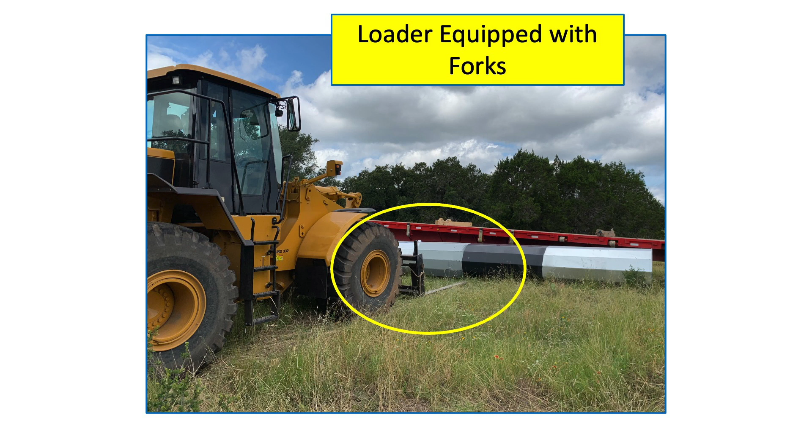The difference is that a loader like this is an articulating loader that hinges in the center with hydraulics, and the front end swings back and forth. It is nowhere near what a forklift is, and there's a very distinct difference because of the licensing or the qualification of the operator. In all of labor, there are only 2 operator licenses that are required.

One of those operator licenses is the forklift operator. And the forklift operator has to be licensed, which they can be licensed by the employer's own training program, but they have to be licensed to a specific criteria. In other words, they have to know information for a written test. The information they have to know is specified by OSHA. They have to demonstrate the use of the forklift. They have to demonstrate the inspection of the forklift. And they have to do that with a qualified inspector.

And then once they've done that, they receive a license, which can be on the back of a business card. All it has to have is the name of the inspector that did the training, who did the inspection, the name of the person, and the model of the forklift that they are qualified to operate. And that's a requirement of the standard.

Now that puts a certain responsibility also on the operator, because once you hold a license, you now have a responsibility to operate that forklift within the confines of the safety requirements of the OSHA standard and the employer's OSHA standard. The difference is that the other license is a crane operator. Those are the only 2 licensing requirements.

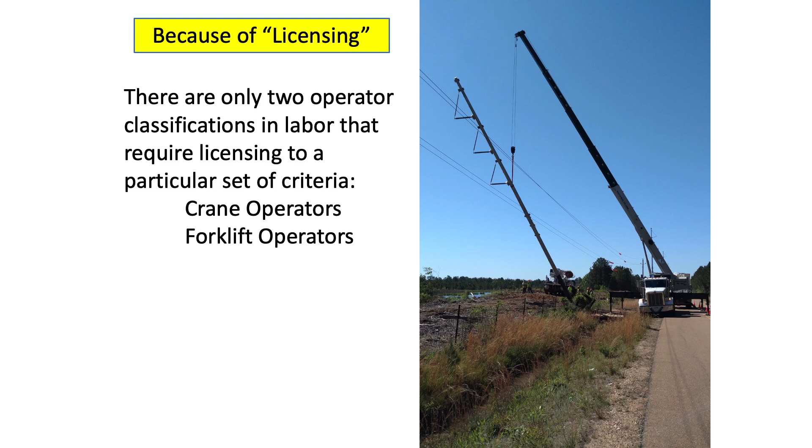The crane operator has to be licensed by a third party. They cannot be licensed by the employer. And that third party has to be certified and has to be approved by OSHA, having received their certification under a nationally recognized certifying agency. So that's where you get the idea of NCCCO and some of the others. I'm not advertising one over the other, but that's just an example that you're probably already familiar with. Now, the difference.

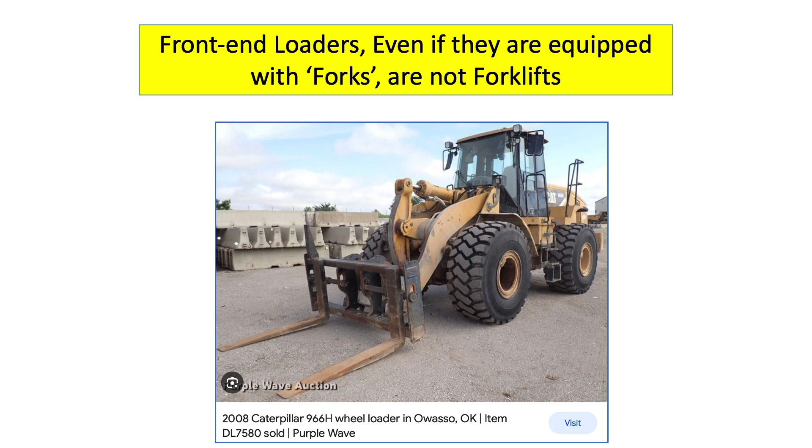Front end loaders, even if they are equipped with forks, are not forklifts. Now, I said that it's litigation that has brought me to these particular topics because on a number of occasions, OSHA has cited a contractor for having unlicensed operators operating loaders with forks. And because of the work that they were doing, they called that a serious violation of the forklift operator standard. And it's simply not true.

Now, here's the hard part. I always hate to do this, but we have some rules in the OSHA standards, and the worst thing that you can do as a trainer is put a whole bunch of text on a board for a whole bunch of people to try to read. But the reason why I do this is because no matter how much I tell you that the rules are there, very few of you are actually going to go and read it, unless you are the people who are administering it. So we're going to touch on these rules.

OSHA calls them PITs, powered industrial trucks. So first we're going to talk about the PIT standard and why it doesn't apply to these loaders equipped with forks. The very first rule: this section does not apply to compressed air or non-flammable compressed gas operated industrial trucks, nor to farm vehicles, nor to vehicles intended primarily for earth moving or over-the-road hauling. So what is a front end loader designed for? It is designed and built to move earth. It's an earth moving piece of equipment.

But we have found that because they can navigate very, very rough terrain with great efficiency, they have a lot of power, so they can lift heavy pieces of equipment and materials that we use in transmission construction. They are the perfect tool to operate on these right-of-ways, which is the reason why we've been using them.

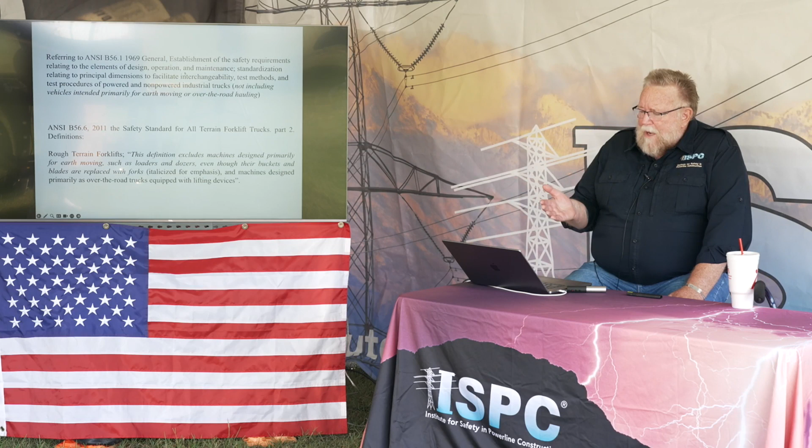So if you are a safety administrator, knowing the OSHA rules is one thing. Reading the preamble is just as important, if not more important, than knowing the rules, because it's the preamble that tells you what OSHA's intent was. The preamble includes all of the discussion by stakeholders, because when OSHA creates a new body of rules, the first thing that they do is they put out a notice of rulemaking, or what the proposed rules are going to be.

Then the stakeholders, the ones who are going to be covered by the rule, will send questions to OSHA, and sometimes OSHA will have hearings around the country for rulemaking that's going to have a huge impact on an industry. And these stakeholders will come and ask OSHA questions, and OSHA will answer the questions about why the rule is the way that it's written and what it's supposed to cover. So there's a ton of information there that is valuable to you as the employer, as a supervisor, and even for foremen to understand what it is that the rule intends.

Because the rule itself, remember, doesn't necessarily tell you how to do something, it tells you what you have to accomplish. And that's an important distinction between those two. You find out what you're supposed to do and how you're supposed to accomplish that by reading the preamble.

So in the preamble, OSHA addressed rough terrain forklifts, and they wrote, and this is the bottom paragraph that you see on your screen, the definition excludes machines designed primarily for earth moving, such as loaders and dozers, even though their buckets and blades are replaced with forks, and machines designed primarily as over-the-road trucks equipped with lifting devices. These are not forklifts. And then finally, in the preamble, the direct question was answered. It says equipment that was designed to move earth but has been modified to accept forks is not covered by this rule.

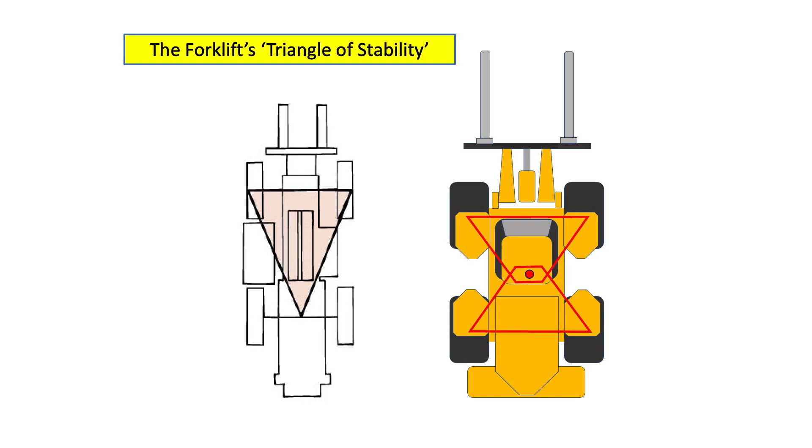Now, if it's articulating at a center point, it's not designed anywhere near with the same kind of stability that a forklift has. So the whole design concept of the stability between the two means that that operator, who has to be qualified as an operator, understands how that loader equipped with forks is going to move and be operated, but is not required to meet those forklift standards because the two pieces of equipment are not alike at all.

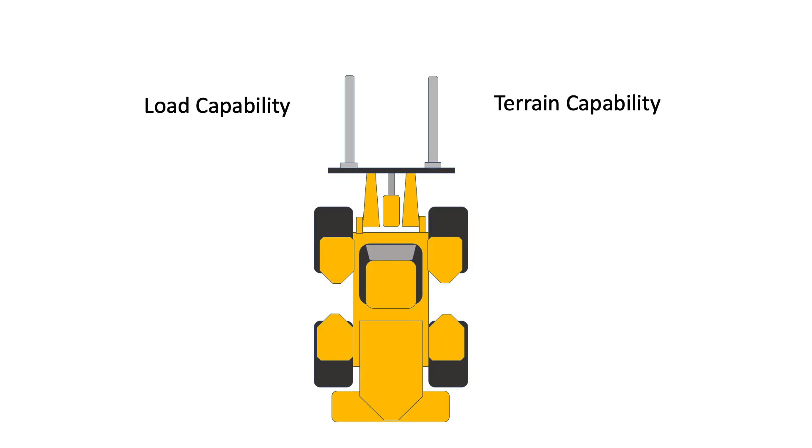And like I said before, the reason why we have been using these loaders is because of that load capability and that terrain capability. The other thing that we have seen, and one of the citations that came about, was called load securement. Now, if you are a forklift operator, you know that you slide the forks underneath the pallet. The pallet is supposed to be stacked a certain way, and you're supposed to secure the load.

And normally, we slide the load all the way back on the forks so that it lays against the backrest, and then we tilt it back slightly to help secure that load. And if we need to, we may strap or plastic wrap that load so that the load won't fall off. That's important, especially if you're in a warehouse full of people, because people are always nearby when these forklifts are operating.

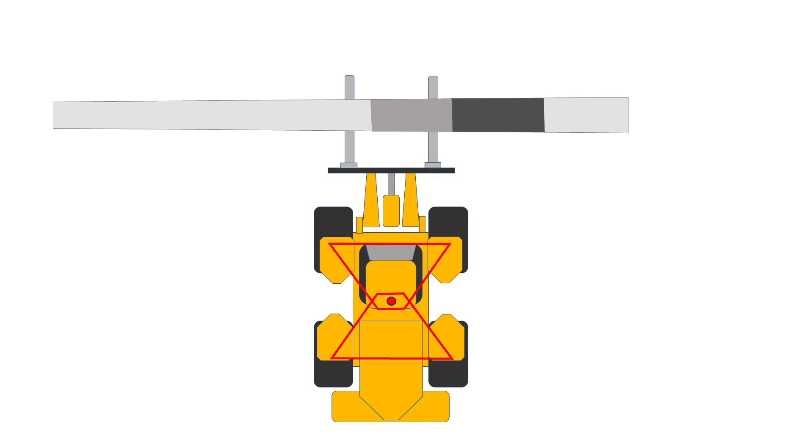On the other hand, if I've got a 6,000-pound pole sitting on the front forks, I don't tie it down. I'm going to tell you why in just a minute. So immediately the first thing that people say is, well, that's dangerous. A 6,000-pound, and usually there's 12 flat sides on most of these transmission poles. Some of them might be round concrete. They said it can roll or it can slide off of the forks. And so the answer to that is, so what?

Watch this. If the pole falls off of the forks and hits nobody, OSHA doesn't care. It's that simple. I thought about writing a book about the simplicity of complying with OSHA, and I'm going to title it, Don't Swim with Piranhas. If piranhas will eat you when you're in the water, how do you prevent that? Don't swim with piranhas. Well, if a pole falling off of the forks will hit somebody, don't allow anybody to be in that space. So this has to do more with work planning and methods of work than anything else. And there's a good reason for that.

Now, let's look at this. Here's our loader. Our pole falls off the loader. There is a hazard zone where that pole might go. Now, we're professional linemen. We know what the trajectory of hazard is when we're under a strain. We figure those all the time. We know where the wire is going if something breaks. We know where the rope's going. We know where the hoist is going. We stay out of that line of fire.

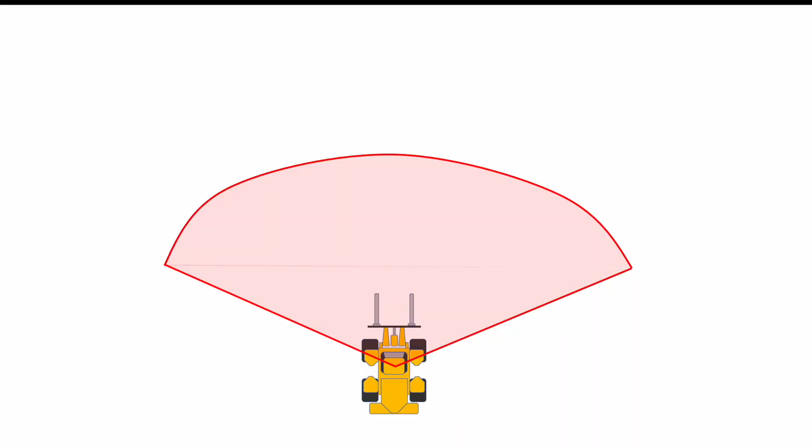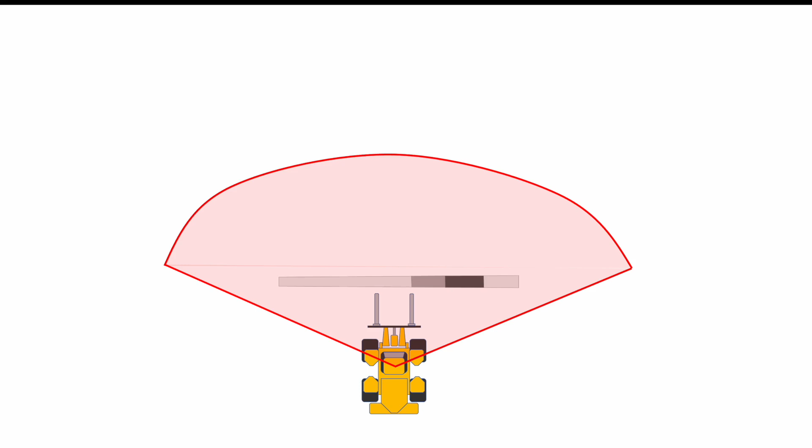Well, we do the same thing with a pole on the front of a forklift. If I put a pole on the front of the forklift, then my work procedures ought to say, this is where you stand, this is not where you stand. And sometimes there's no great distance. Sometimes we pick it up off the back of the truck, move, we set it down, and it stays right there until the crane comes by, picks it up, and puts it in the ground.

Other times, because of the terrain, our staking point may be some ways off, and we may have to go some distance with that loader. That might include rocky areas or inclines or slopes. If we have a policy and we have a tailboard that says, okay, here's where we're picking it up, here's where we're going. If we lose the pole, this is where the pole's going. Just make sure you're not there. If it falls off, nobody gets hurt, no big deal.

Now, the question is then, well, why don't we just tie it down? I have seen these used on job sites. Now, this is called a timber carrier.

Sometimes I have some other names for them. And I wrote on here, great for mills like timber mills, not so great for poles. See, if I'm carrying pieces of wood and I clamp down on that piece of wood, I can pick it up, I can turn around, and I can go where I want to with it.

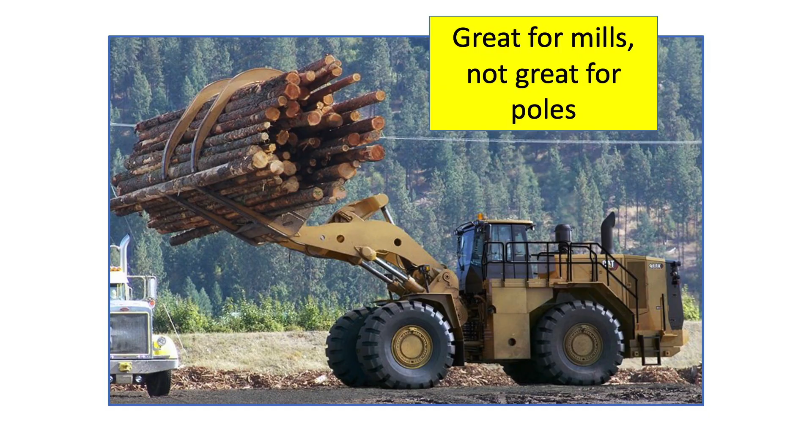But what happens when we put a 30-foot long, 6,000-pound pole across the span of the forks and we clamp down on it? Well, remember the idea of the stability that we talked about? Look how this loader moves. The loader moves by articulating. And when the loader moves by articulating, look what happens to the dynamics of the loader stability when the pole weight is on there. If I articulate around to the side, you can see the angle across the square of my wheels has changed, and so has the support dynamics of the piece of equipment.

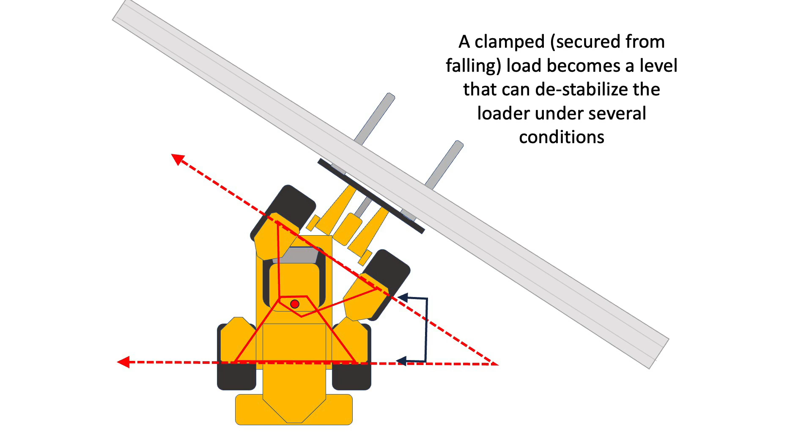So if I've got a 6,000-pound pole and I've got it strapped down to the loader, and I have some elevation on my load, maybe because of terrain or whatever, and if the pole starts to rock, and it puts 6,000 pounds of sideways torque on that side of that loader, what do you think is going to happen? There's a good possibility the loader will turn over. So it may not be a good idea to clamp that loader.

Of course, the other side of that is that if we're using the clamps, we also damage the galvanizing or the coating that's on the pole. That's another side issue. But the bigger of the issues is that if I clamp the pole down, I lose stability. So what it boils down to is this: your loader operator has to be qualified as a loader operator. They have to be trained in the dynamics of lifting a pole.

You should have a policy for loading and unloading poles on your job site and the use of front load fork equipped loaders. The people on the ground should be aware of where they are supposed to be and where they shouldn't be when we're doing loading, and recognize that losing a pole is no big deal as long as nobody gets hurt. Now, you can choose to use the clamps if you want to, and if it's just a matter of picking the pole up, lowering the clamps, and we're not going any great distance, and the terrain is okay, there probably won't be any problem.

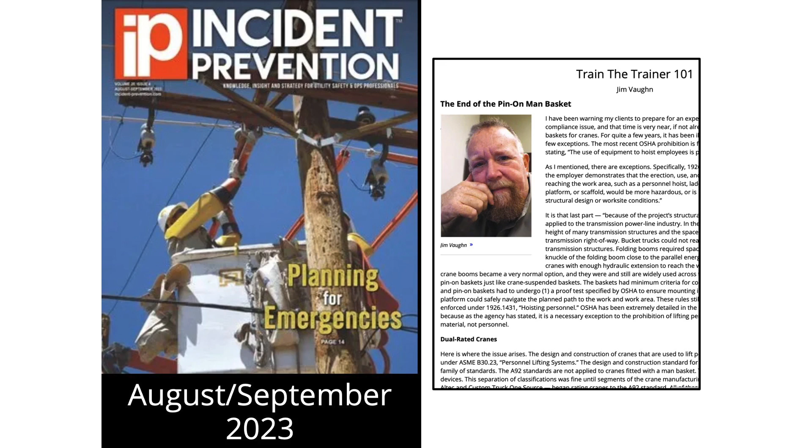Now, Incident Prevention, most of you who are watching today are probably familiar with Incident Prevention Magazine. In the August-September 2023 edition, I wrote an article in Train the Trainer 101, and the title is The End of the Pin-on Man Basket, that explains this issue with the man basket. Read that article, because it goes into very much detail about why this is becoming an issue with pin-on man baskets, but we're going to talk about it here. I'm going to explain it.

So that rule that says lifting workers or personnel is prohibited goes on to say, except where the employer demonstrates that the erection, use, and dismantling of conventional means of reaching the work area, such as the personnel hoist, ladder, stairway, aerial lift, elevating work platforms, or scaffold, would be more hazardous or is not possible because of the project's structural design or worksite conditions. This is the exception.

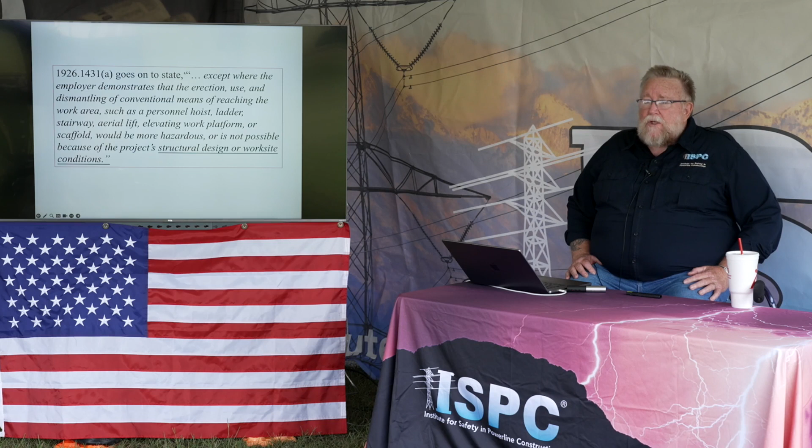Structural design, worksite conditions. Well, one of the worksite conditions is that for the longest time, there were few bucket trucks that would reach the top of a 200-foot pole. Well, that's starting to change too. So that could change the way that we do the work. So let's talk about these exceptions.

When we say consensus standard, you probably already know, these are the rules like ANSI, ASTM, ASSE, NFPA. These are groups of stakeholders in the industry that consider work methods, equipment, materials, and they help design the best practices associated with the work. OSHA recognizes that these are best practices, and OSHA uses these best practices sometimes as a guide for their own inspectors, and other times they adopt these consensus standards. When they adopt a consensus standard, it has the authority of law. So if OSHA adopts A92, then the parts of the A92 standard that say shall are citable by OSHA.

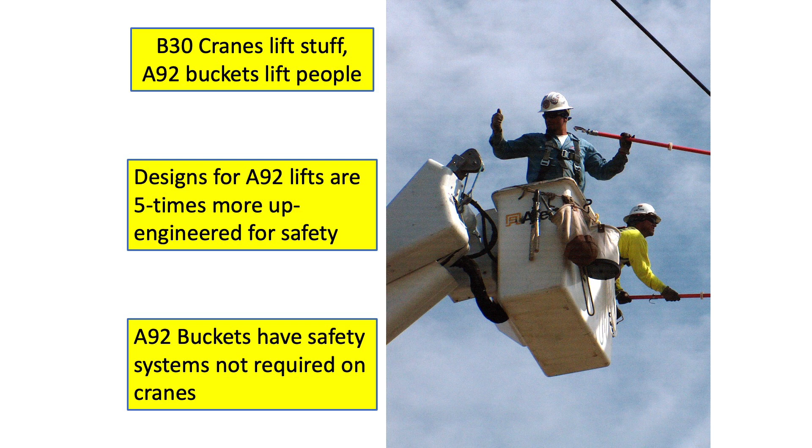The designs for A92 lifts are, and we say on the average, 5 times more engineered for safety than a crane is. You know, the crane considers that we pick it up, we swing it around. If something breaks, the crane falls down, doesn't hit anybody, no big deal. On the other hand, any bucket truck that comes down has got people in the end of it. It's always going to hurt somebody. So the criteria for the protection of workers generally has a much higher safety standard than a mechanical standard or a rigging standard might have.

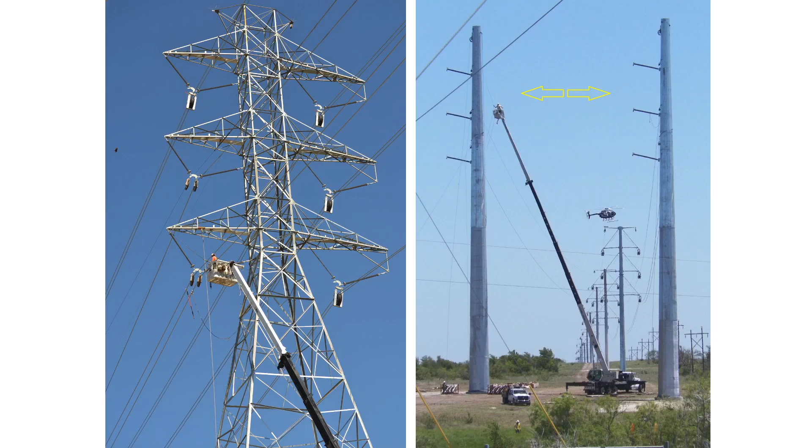And then A92 buckets have safety systems that are not required on cranes, such as elevation or balance setup so that you have a level balance, tension on the outriggers. There are a number of other sensing systems, and if you're a lineman that's been running a bucket, you know that sometimes your bucket shuts down in the middle of an operation because some safety system somewhere locked up, and you couldn't go any farther because you had to back up in order to reset whatever the safety condition was that locked up the bucket.

But this is the basis for the exception. Remember we said the structure or conditions. And what you see here is a man basket on the end of a crane. Look at the picture on the right. Just to the side of the structure that they're working on is another structure that's only about 50 yards away. Well, if I had an articulating bucket truck and I wanted to go to those inside insulators on the side of that pole, I have to be concerned about the other end of my elbow. It's going to be bumping into the pole on the other side.

And if you're working in a right-of-way where you're building a new circuit where other circuits already exist, and I put that articulating boom up in the air, the elbow of that boom is going to be over there in that electrical environment, picking up induction or whatever else is in there. That's one of those structural conditions that we have used as an exception that allows us to use pin-on man baskets. The other one is the conditions of the project.

You see that this boom here is at the bottom set of travelers on this structure. That top set of travelers is close to 200 feet up in the air. Well, almost every 35 or 40 ton crane will reach that 200 feet. Bucket trucks would not do that until recently. Most of those bucket trucks we have had historically in the industry would barely reach 160 feet. But the manufacturers have started to employ some other technologies in their booms.

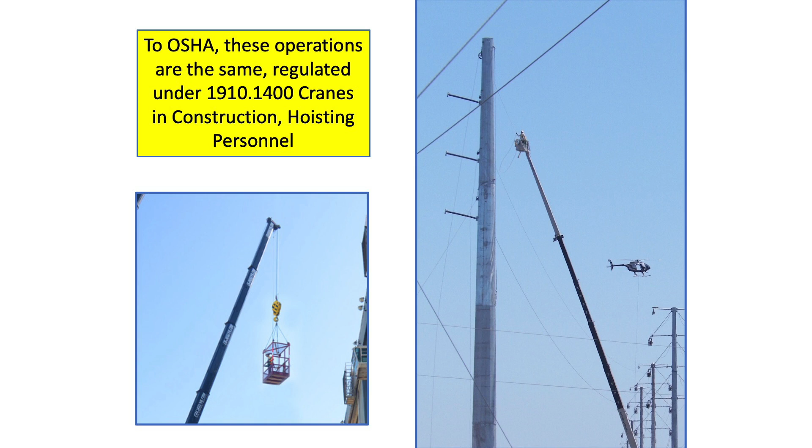Now, one of the things that has come up in a number of inquiries or debates between OSHA and the employer has to do with the proof test and the trial lift. You can read the rules here, or you can read it in the standard. In the crane standard, if I put a basket on a crane, I have to do a proof test. I load the basket to 125% of the rated load of the basket, I lift the basket off the ground, let it sit there for a little bit, then I shake it, check it, and make sure that the basket is stable and safe to use.

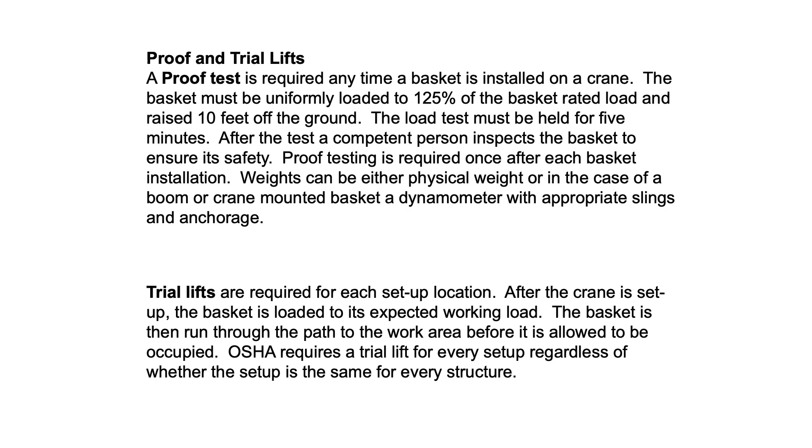Then we do the trial lift. In the trial lift, we take the basket up into the air into all of the working locations to make sure that the basket can safely reach the work that has to be done. Both of these are required by law under the B30 standard for cranes equipped with a basket. The A92 standard does not have that requirement.

Now, under the A92 standard, we still have to inspect the basket. We still have to fly the boom. We still have to make sure that the boom and the basket is safe to work out of. But we don't have to do this described proof test and trial lift. So OSHA has cited some employers using an A92 dual rated crane for not doing the proof test. And the question is, if it's an A92 crane, does it require the proof test? That's still up in the air and yet to be decided. OSHA has not addressed it.

They haven't addressed it in any of the citations or interpretations, but I think you can argue that doing the inspection of an A92 dual rated crane, doing the fly around and doing the inspection of the basket just like you would a bucket truck will probably meet that same standard. We can certainly meet the intention of ensuring that the basket on the boom is safe to use.

The other question is about controls operating from the basket. OSHA says if a crane is on the site purely to put a man basket on it to reach the work, that man basket has to have controls in the basket for the operator.

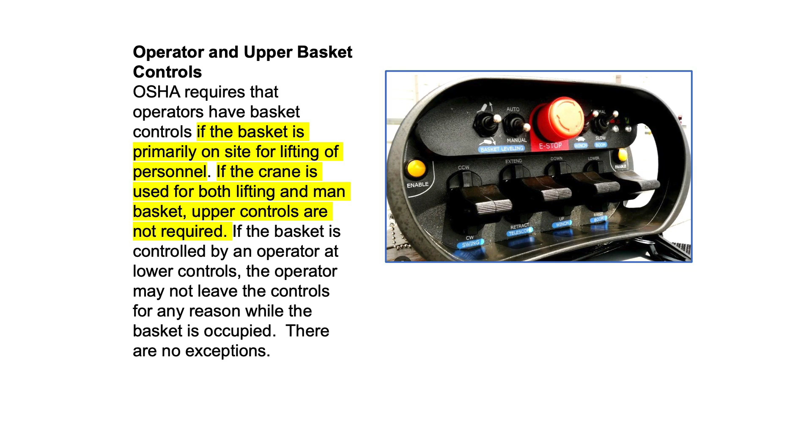Okay, so if it's on site purposely and only to lift a basket with men in it, there has to be a remote operator. So we now have radio controlled remote operators, and you would have one in the basket. If the basket is on site and going to be used both for sometimes a man basket and other times to lift a pole, lift an arm, lift equipment, it's being used for both, then the crane operator can run the basket and no remote operator is required in the basket with the men.

So keep that clear. The last thing is, and OSHA has done this also, shows up on a job site with a crane on a basket and asks who is the A/D director, assembly, disassembly. When OSHA shows up on a line crew and says, who's the A&D director, nobody knows what they're talking about.

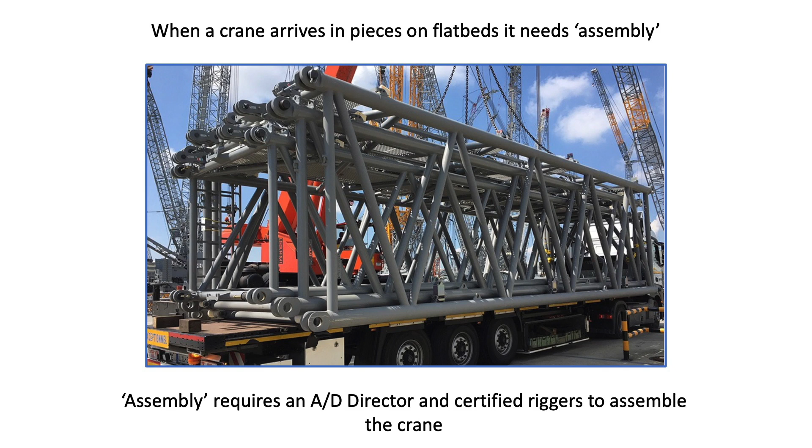Well, in the world of cranes, some cranes are delivered to a job site on a truck, and there may be 2 or 3 trucks, and then another crane is required to assemble that crane. That's assembly and disassembly. The A/D director guides that assembly and uses a certified rigger in order to assemble that crane. Well, OSHA has cited boom truck cranes, hydraulic telescoping extension with a basket on the end, for not having an A&D director.

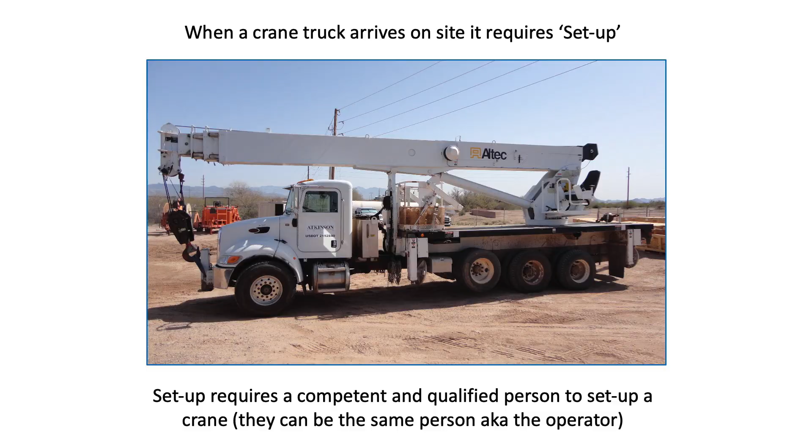But OSHA has also addressed that in the preamble. And here's what OSHA said. A boom truck comes to the job site, it does not have to be assembled. It's ready to go. So there is no assembly. OSHA says that assembly has to do with using a second crane in order to piece together parts of the crane in order to create a working crane.

A 30-ton hydraulic boom truck arrives on a job site ready to go. So it only has to be set up, and OSHA says setup does not require an A/D director. It only requires a competent and qualified person who can be the operator, the same person. And that also applies to swing around jibs. So if you've got a swing around jib that's going to increase the length, that's not considered assembly.

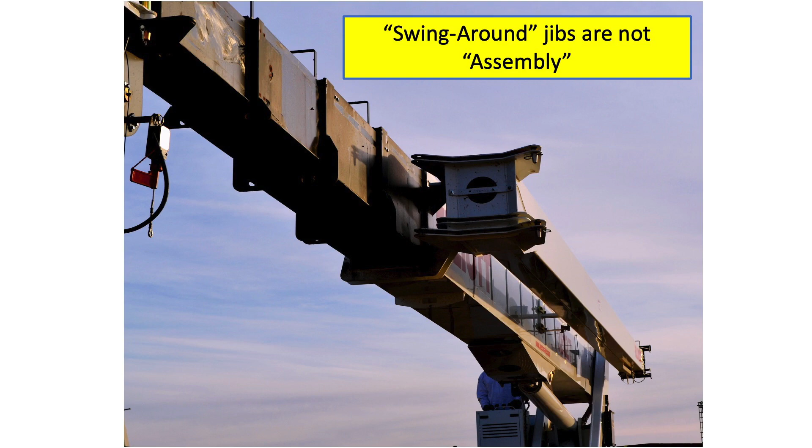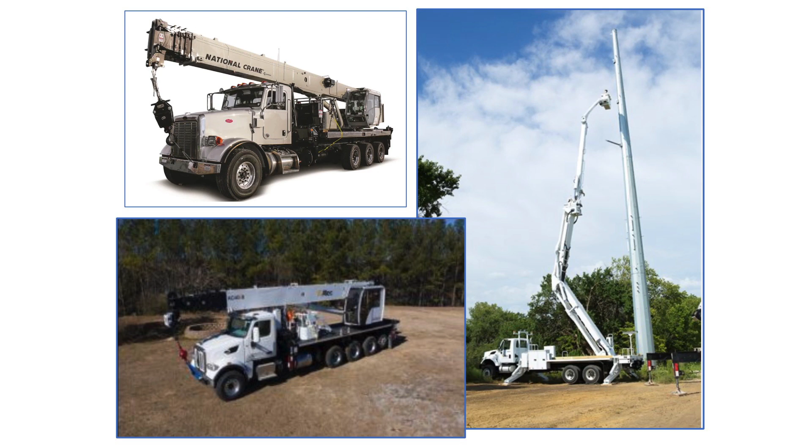So what we're seeing now is more and more of these, and these are examples of cranes that come with baskets attached on the boom that are dual rated buckets, and you're going to see more and more of them available. And they also reach this distance that we have been concerned about in the past. So the last thing is make sure that your personnel understand these requirements and that they follow these rules.

And like I was telling Brent this morning, there are a lot of crane operators who don't understand that that license in your pocket puts very important responsibilities on you. And that is that you are the last person who is going to inspect that piece of equipment before those men or women, line workers, get in that basket and go aloft. Don't shirk that responsibility or think that it's not important. Do those inspections, do the proof lift test, and do the trial lift, and follow through with the rules. If you've done that, nobody can hold you accountable for anything that goes wrong because you've done your job.